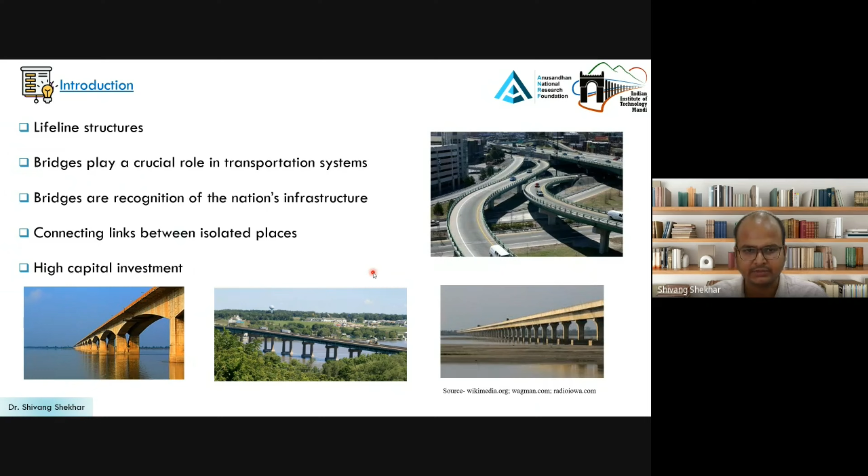Throughout their service life, bridges are continuously exposed to environmental stressors such as corrosion, flooding, and scour, which progressively deteriorate critical components and reduce structural capacity. Moreover, many existing bridges were designed using antiquated design standards, making them more vulnerable to natural hazards, including earthquakes. Therefore, assessing their lifetime vulnerability is essential for ensuring long-term safety and resilience.

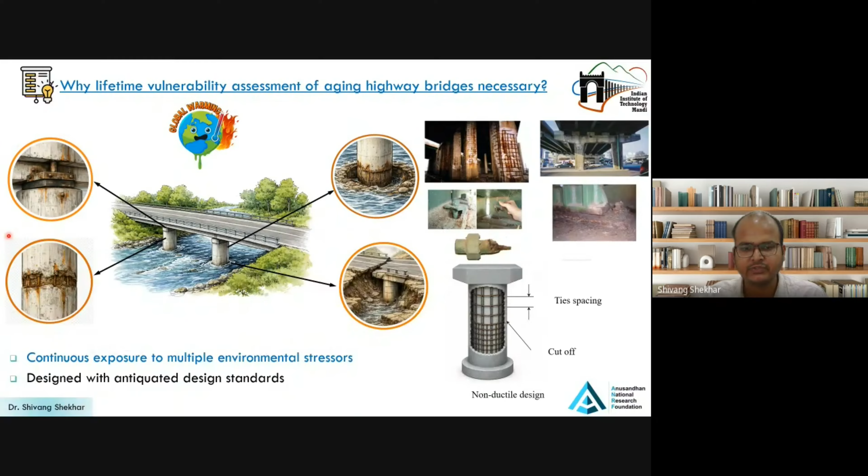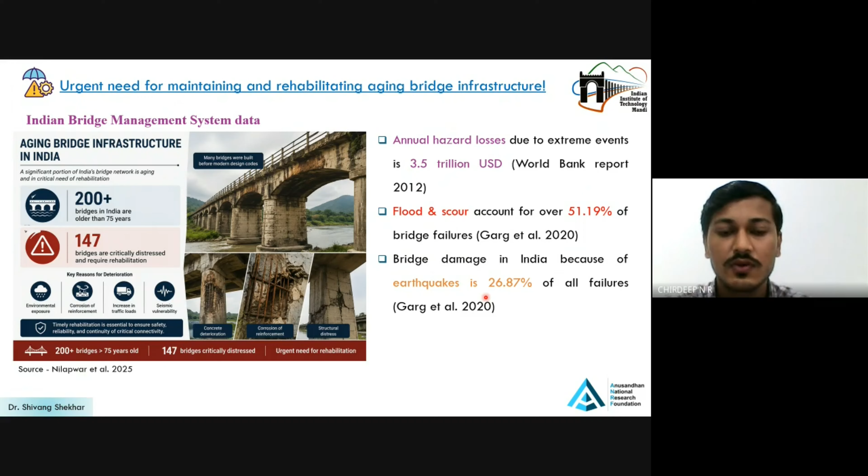India's aging bridge infrastructure demands timely maintenance and rehabilitation. Over 200 bridges are older than 75 years and 147 are critically distressed. Flood and scour account for over 51% of bridge failures, while earthquakes contribute nearly 27%. This underscores the need for lifetime vulnerability assessment and rehabilitation planning.

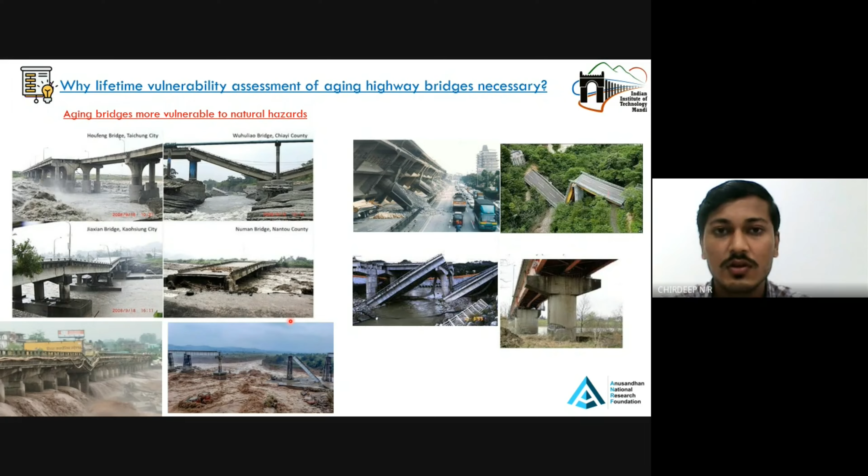Now, these images show some major bridge failures caused by natural hazards across the world. Most of these failures are associated with earthquakes, floods, and scour, often acting on already deteriorated bridge systems. Climate change further accelerates bridge deterioration by increasing corrosion and intensifying floods and scour. Consequently, aging bridges become more vulnerable over their service life.

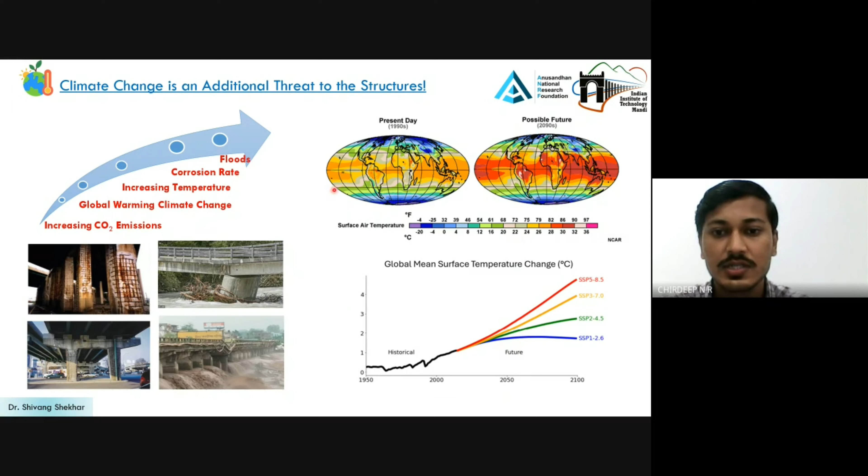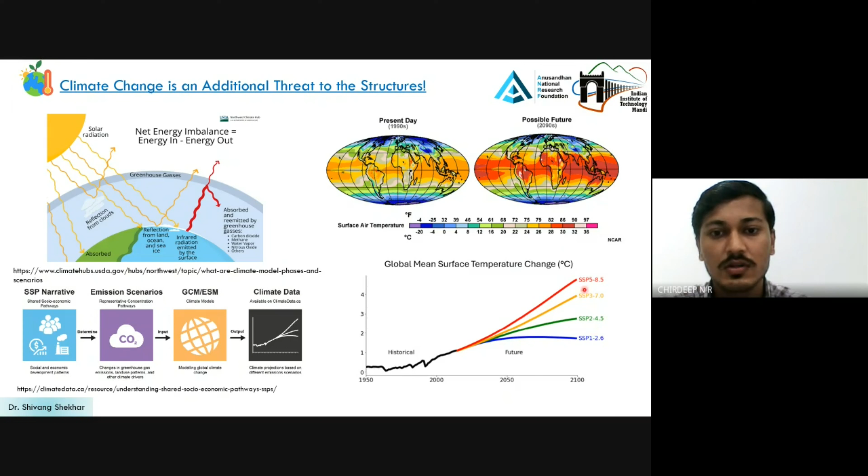To account for these future changes, this study incorporates CMIP6 SSP climate scenarios to assess their impact on bridge deterioration and lifetime vulnerability. Now, higher temperatures accelerate chloride-induced corrosion, causing cracking, concrete spalling, and reinforcement loss. These deterioration mechanisms reduce bridge strength and ductility, making them more susceptible to severe earthquake damage.

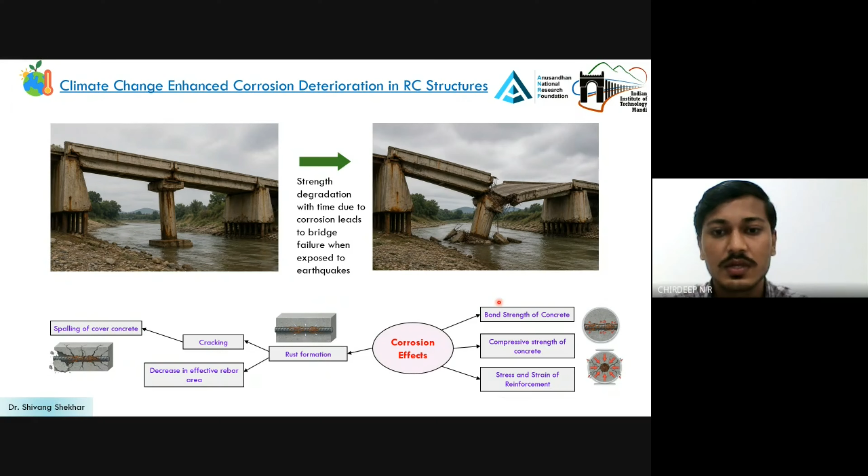By incorporating climate correction factors, the average corrosion initiation time reduced from 31 years to 22 years, demonstrating significantly accelerated deterioration under future climate conditions. After corrosion initiation, the corrosion rate increases progressively under changing climate conditions, leading to greater reinforcement area loss and continuous degradation of both steel and concrete properties. Consequently, the bridge experiences a substantial reduction in its load carrying capacity and seismic performance.

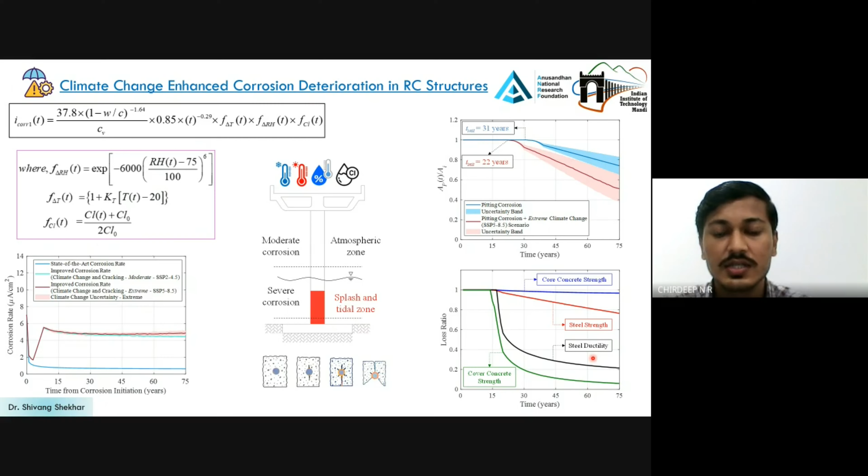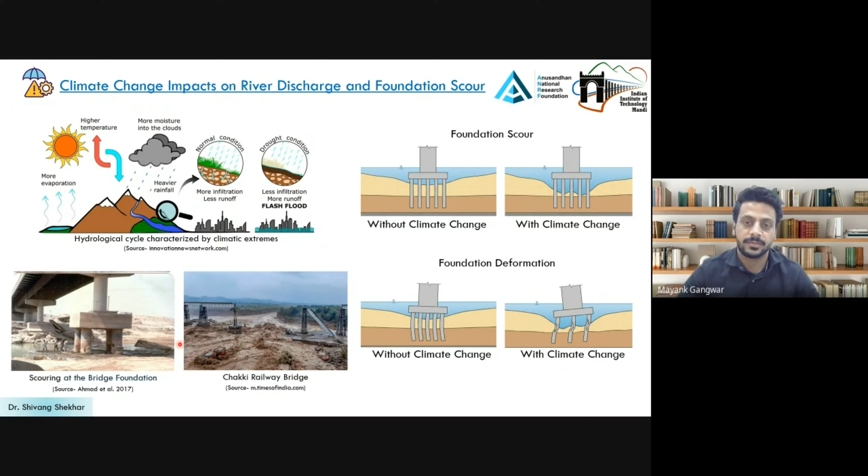Climate change not only accelerates corrosion but alters the hydrological cycle by increasing extreme precipitation and flood intensity. These higher river discharges result in deeper foundation scour, reducing foundation stability and causing larger deformations. Consequently, riverine bridges become significantly more vulnerable to structural damage and failure during extreme events.

Scour can be evaluated using two approaches: as a time-dependent process over the bridge service life or under an extreme flood event. In this study, the time-dependent scour depth was estimated using historical discharge data, while the effect of climate change was incorporated through future discharge projections for the 100-year design flood. As shown in the figure, increasing river discharge under future climate scenarios results in significantly greater scour depths, making bridge foundations more vulnerable.

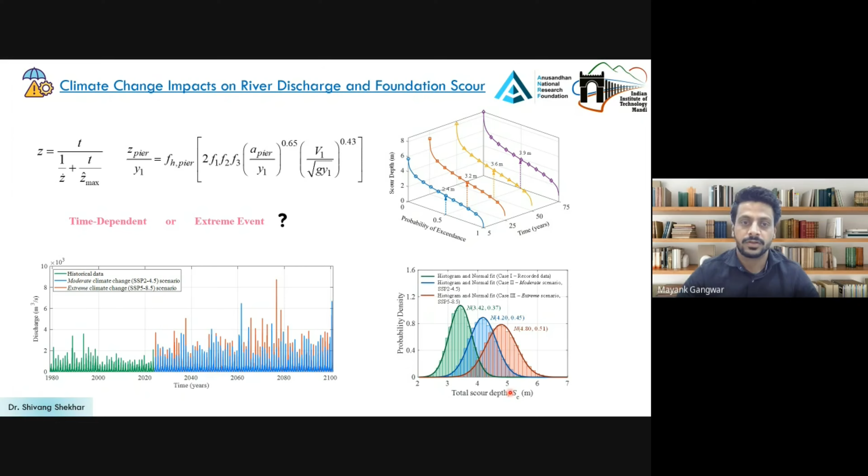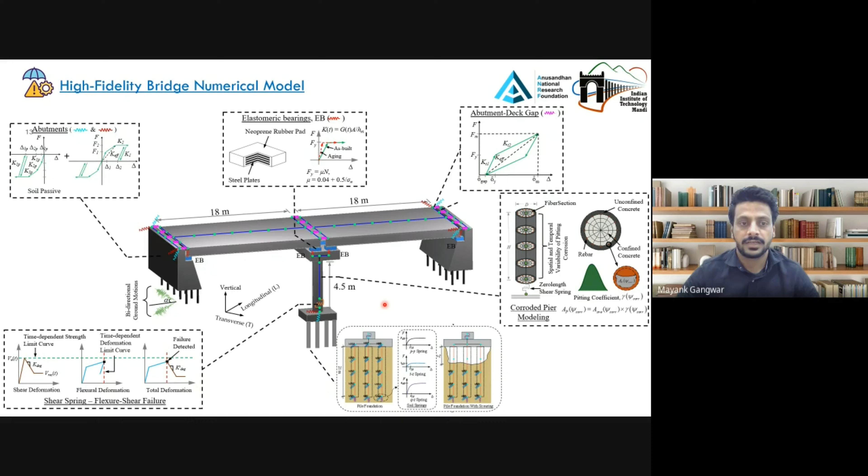Till now, we have seen how climate change accelerates corrosion deterioration and leads to deeper foundation scour. To evaluate the combined impact of these climate change-induced hazards on bridge performance, we have developed a high-fidelity finite element model of a typical highway bridge in OpenSees. The developed numerical model was validated against experimental studies, providing confidence in simulated structural responses.

After developing the numerical model, we investigated the effect of climate change accelerated corrosion on the service load reliability of an RC bridge in Gujarat, India. The result shows that climate change significantly increases the impact of corrosion, reducing the bridge shear capacity. Consequently, the bridge reaches an unfit for service condition about 18 years earlier, highlighting the importance of accounting for climate change in durability assessments.

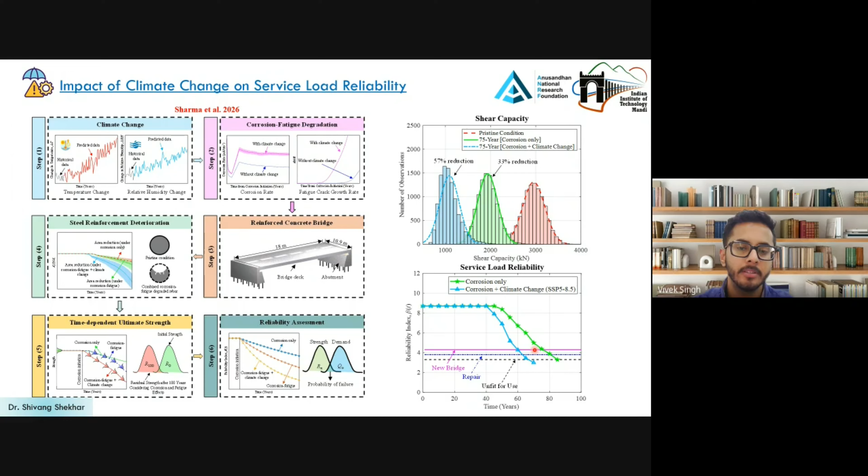Next, we investigated the combined effect of climate change accelerated corrosion and earthquake on the seismic vulnerability of aging bridges with the help of seismic fragility curves. The result shows that corrosion significantly increases the bridge seismic vulnerability, and climate change further amplifies this effect, with the highest vulnerability under the SSP5-8.5 scenario. Consequently, the bridge experiences greater functionality loss and lower seismic resilience after earthquake.

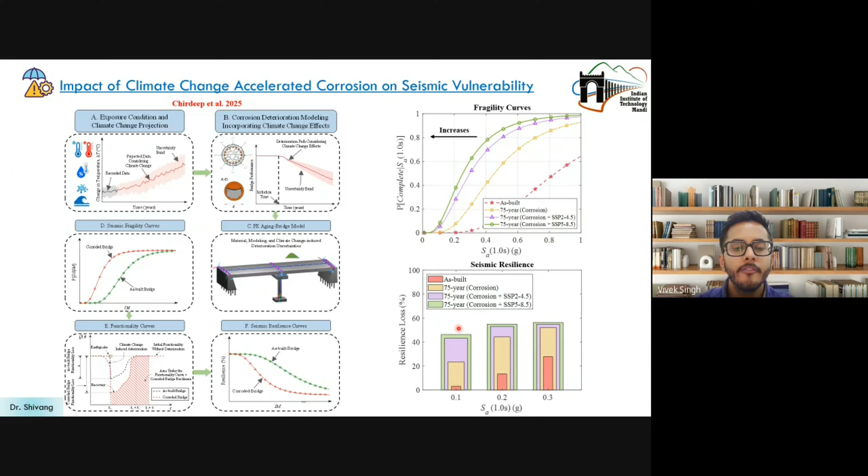Next, we investigated the impact of climate change induced scour on the seismic vulnerability of riverine bridges. The result shows that the seismic vulnerability increases significantly under future climate scenarios. Compared to the historical condition, the bridge exhibits a higher probability of failure under both SSP2-4.5 and SSP5-8.5, with the highest vulnerability under the SSP5-8.5 scenario. Likewise, the increased scour depth due to climate change significantly reduces seismic resilience of the bridge.

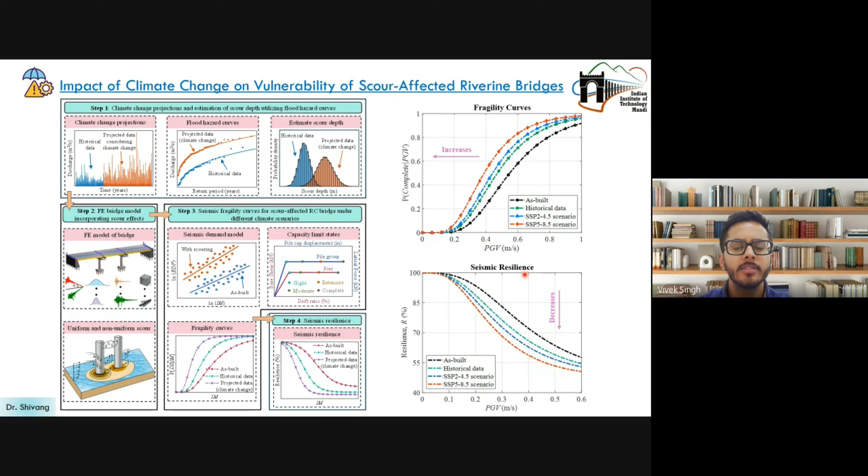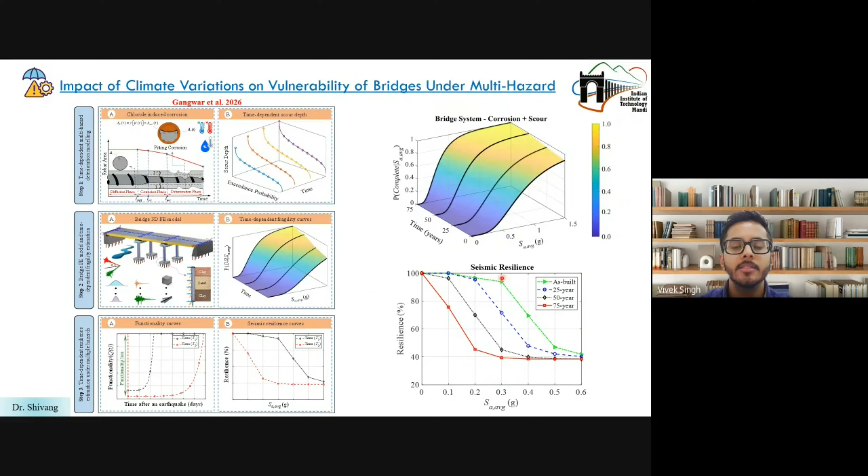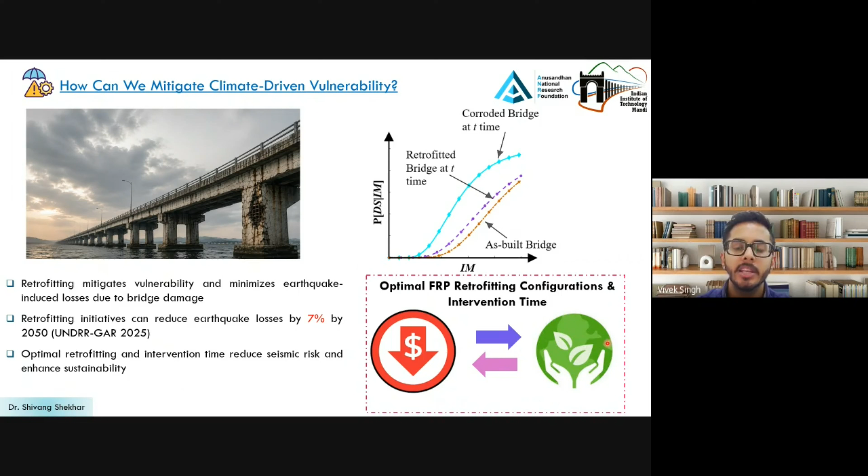So far, we have seen that climate change accelerates corrosion and scour, therefore increasing the seismic vulnerability of aging bridges. However, mitigation is equally important. While seismic retrofitting is an effective solution, its performance depends on the retrofit configuration and intervention timing. Optimizing both is therefore essential to maximize safety, extend the service life, and improve sustainability. Therefore, we next investigated suitable retrofit strategies to mitigate these adverse effects.

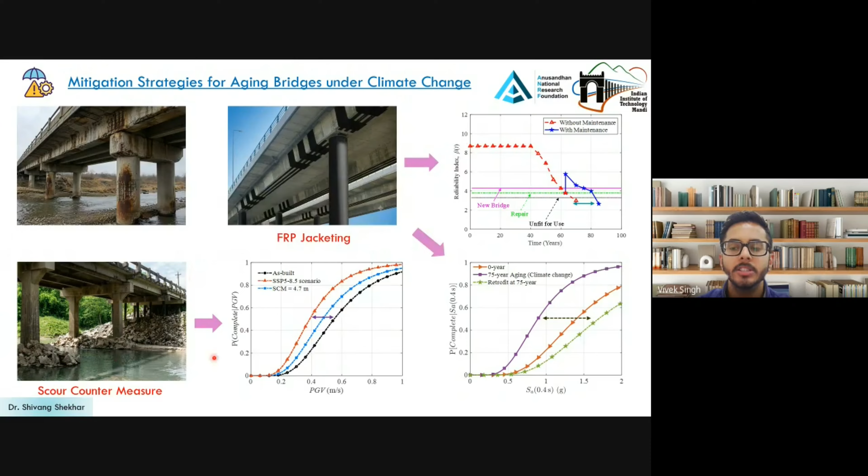First, we evaluated the effectiveness of FRP jacketing in improving service load reliability. The result shows that strengthening the bridge girder with FRP delays deterioration and extends service life. FRP jacketing was then applied to the bridge pier, thereby reducing its seismic fragility. Finally, riprap was adopted to mitigate climate change-induced scour, improving foundation stability and lateral load resistance while reducing the seismic vulnerability of the bridge.

Finally, we evaluated the effectiveness of these retrofit strategies in terms of seismic risk and resilience. The result shows that timely FRP retrofitting reduces seismic risk by enhancing the bridge structural capacity, while riprap improves foundation stability and seismic resilience under climate change. Overall, both strategies effectively mitigate climate change impacts by reducing the bridge vulnerability and risk while enhancing the resilience.

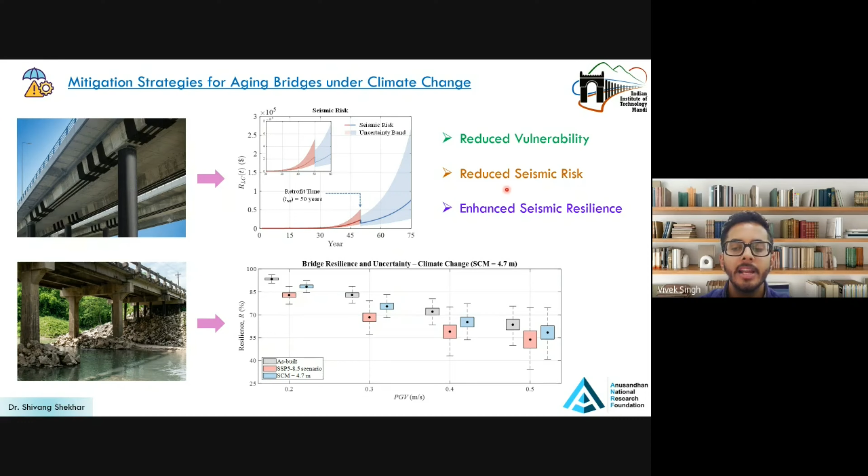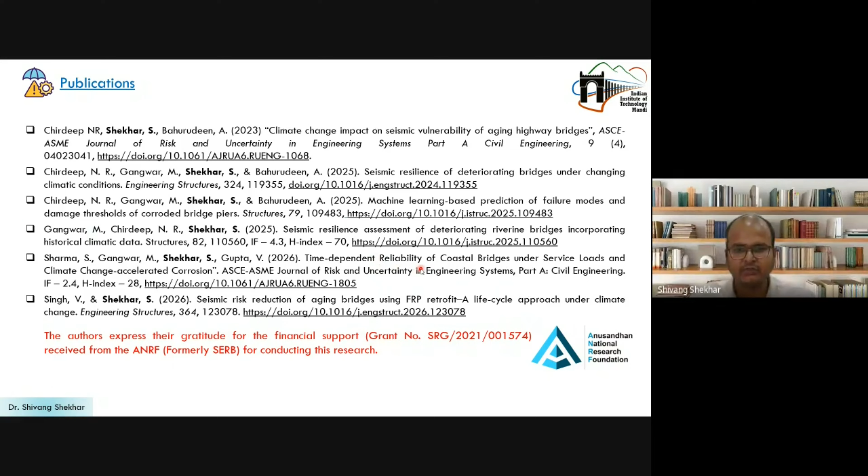The outcomes of this research have been published in several reputed journals and international conferences in the field of structural and earthquake engineering.